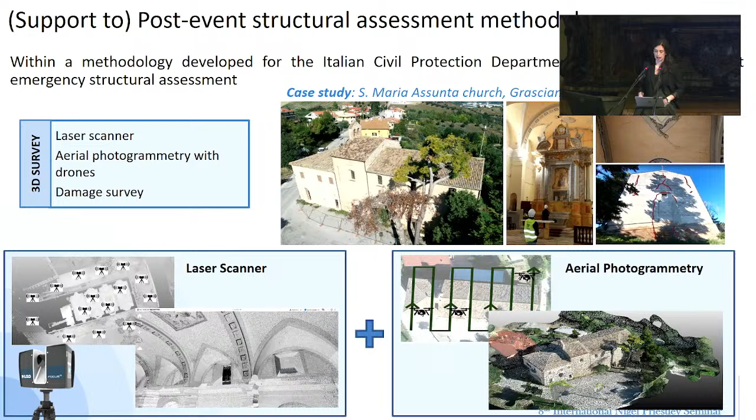So let's start having a look at what we have developed in recent years. Some of the technical services we have developed for the civil protection, for example, methodologies that are applicable in case of post-event. These methodologies have been successfully tested, and now the use of digital applications, for example, allows us to perform 3D surveys, photogrammetry that allows us to create a digital twin of the structure that can be later used for final structural modeling or a simplified analysis.

All the data that are collected during the survey, especially on the damage conditions of heritage, can be accessed thanks to the use of virtual tools, in which all the information on damage patterns can be used at a later stage to design correctly interventions for such typologies of structure.

We also operate at a larger scale, when a survey of a large area is required, for instance, with a photogrammetry methodology that we developed to map large areas in a limited amount of time. This methodology is applicable in emergency contexts and is based on practical experience, and of course, the coordination with the stakeholders and regulator was fundamental for its application.

I'm showing you two brief examples of what we have done. For example, the purpose of the exercise was surveying a large area, using two teams that were working in parallel, with a spatial and temporal coordination. This allows us to produce not only

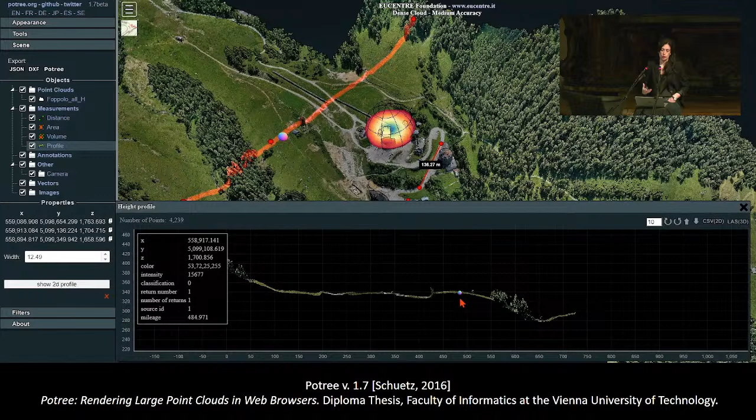Also because the access to technology may not always be easy. Tools like Potree offer advantages. The great power of this solution is that it's possible to share a point cloud on which measurements can be performed, so that the first responder can perform immediate assessment, especially of the critical operation areas.

The second application was a large technical and thematic seismic exercise that took place in the autumn of 2023, in which all the participants were coming from 8 competence centers, and the exercise was designed and promoted by the network. In this case, 5 teams were working in parallel. We have surveyed a total area in a very limited amount of time.

In a total mission time between 2.5 hours, maximum 3 hours, to produce the same type of product that you've seen before for the previous case. The total time for processing is about 2 hours, but the amount of data is significant.

Then, thinking about what we've done so far, what are the challenges, from our experience in our center, at least from my limited point of view? Of course, the team activation is an issue, especially for us that are belonging to a center of competence, and not directly to the drone pilots. The team activation for drone pilots in operation areas, because of the regulation, is still something that needs to be discussed.

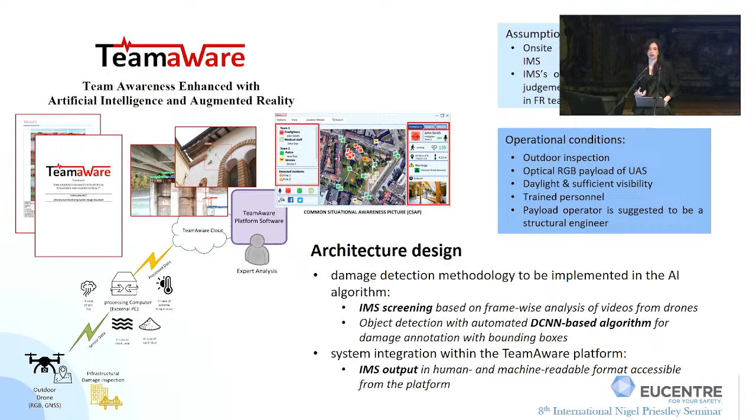The methodology that we have implemented is a tool that is able to screen video acquired from drones, and detect and extract information about damage on buildings. The system is integrated in the platform and allows us to provide to the command center information on the structural safety of the structure. Essentially, this is the application of an infrastructure monitoring system, assuming that we are in a monitoring scenario.

We have provided guidance to the first responders on how to perform the mission, how to acquire data, giving information and instructions on how to perform a survey with the drones. The data are then processed through the user interface, and then the outcome comes in a machine-readable form, so that a tool is installed on the ground station.

If the tool is installed on the ground station, it's present on site and the results are readily available. If not, if the presence of a structural expert is from remote, the data can be uploaded on the platform. Engineers can use the information that is given to perform a structural assessment and then provide information to the teams on site.

Essentially, this is how the tool works. The damage detection module is based on the architecture available at the time in which we developed it, and we are further developing it, constantly using new architectures. The output reporting module allows us to clean and interpolate the information in order to extract a sort of damage lifeline, that is presented as output in the form of a report that is then uploaded on the platform.

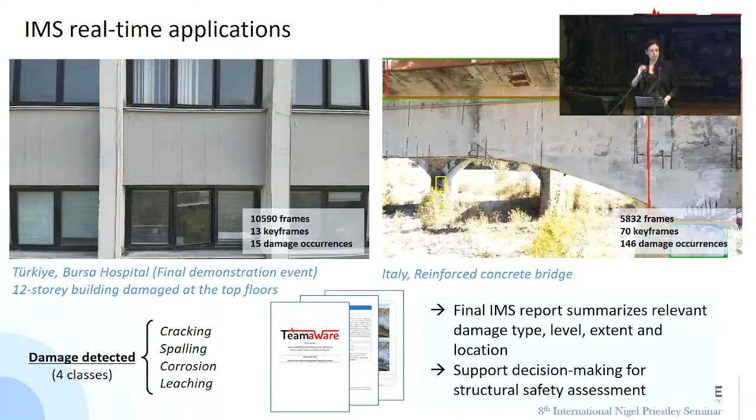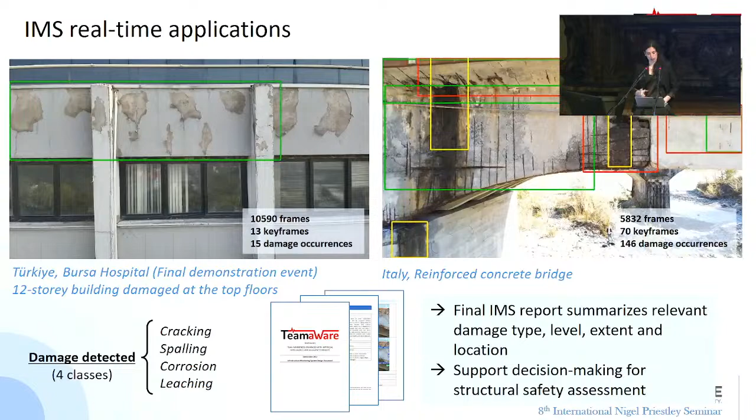Of course, the tool has been tested by the users that were involved in the project. The level of accuracy is still not perfect, but this depends on how much data is used. Although we are using something like 25,000 images, we have tested it only on real images, and there is still work to do in order to reduce the number of false positives. Nevertheless, with an accuracy of approximately 70%, it is a tool for end users for which we had positive feedback.

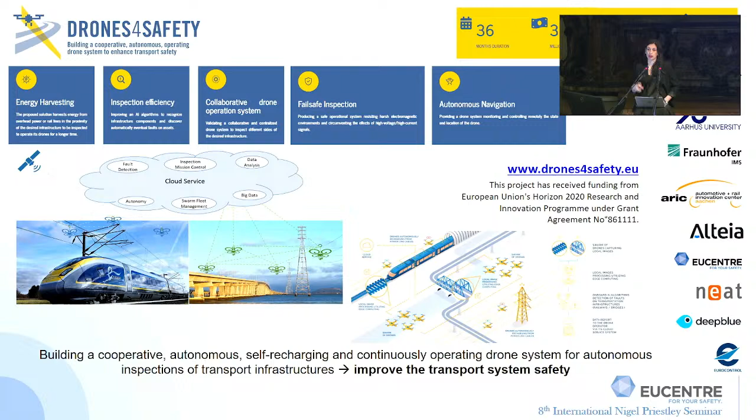The integration of different sources of data, surveys, point cloud generation from photogrammetry and artificial intelligence was also at the basis of another project named Drones4Safety. In this case, the focus was on the monitoring and maintenance with coordinated teams of drones that are supposed to perform autonomous flights recurrently to inspect the structure. We merged the competencies on artificial intelligence with competencies on photogrammetry in order to provide information directly on the cloud on the state of damage of the structure.

What are the challenges? A few of the challenges that are now in place with artificial intelligence. Of course, we need data that are sufficient for the training. We cannot think about algorithms that are trained with a few hundred images, because these are too limited information for an algorithm, especially for real-time applications. Also, there is a need of crowdsourcing. There are only few databases that are available.

We need them to develop instruments that are efficient and applicable. Also, for algorithm development, algorithms are still more focused on the detection of a single class, whereas on field we need information on different classes. Multi-class detection is essential for responders to understand what the situation is. Also, depending on the typology of data used for training, the metrics for the evaluation of the performance of the algorithm are not always efficient.

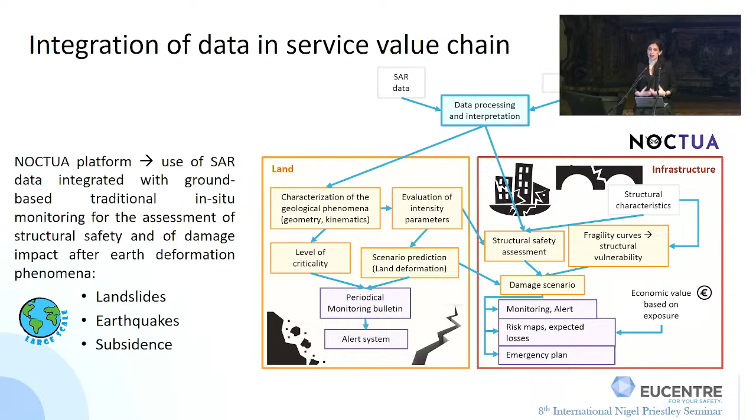We think that the integration of data coming from different sources is essential to provide first responders with meaningful, reliable, and accurate information for emergency management. Not always is the information from satellites easily understandable.

Also in this case, the level of technology required to interpret information coming from the satellite is not always available for the institutions actually working in emergencies.

In this case, the integration coming from monitoring is essential to validate. I'm thinking about the data that are coming from radar sensors.

We are easily drawn to understand the displacement in terms of evolution of displacement, but this is not the direct displacement of the point. This is the relative displacement of the satellite.

This is not always understood by those who will use the information in the field, or they do not have sufficient information to understand the meaning of these results. So these are some of the challenges that we see.

For instance, for the user in Earth observation applications in emergency, the challenge sometimes is also in the data collection, because cloud coverage could determine that the satellite is not capable of picturing imagery, and then the information that could come from satellites is not available on time.

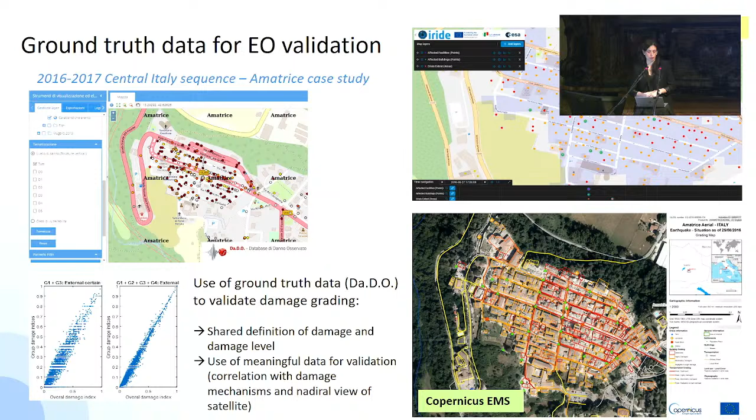In conclusion, I think that there are some issues, some challenges that are common, especially to the most innovative technologies.

We need to think that the solution that we develop has a sort of trade-off.

Because of what I was saying before, not all the institutions taking care of emergencies have available financial resources.

You think of a very high-tech solution, very costly instruments to be maintained over time. Sometimes those institutions are not capable to use them if something breaks.

So sometimes we need to think not just in terms of content of what we develop, but also on the availability and accessibility of the technology, and the technical limitation of who is going to use what we develop, as well as the creation of the technology.

We are developing algorithms, very demanding algorithms. There are cloud services, but what if in an emergency the Wi-Fi connection fails?

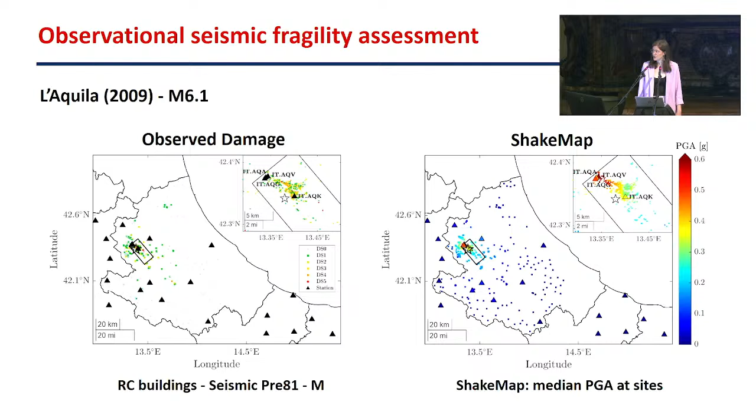On the right you can see the shake map for the event under consideration in terms of median. Once we have this information, we apply models and fitting techniques in order to calibrate the observational fragility functions.

These are the fragility curves obtained when we consider the median shake map, referring to the seismic case study building typology.

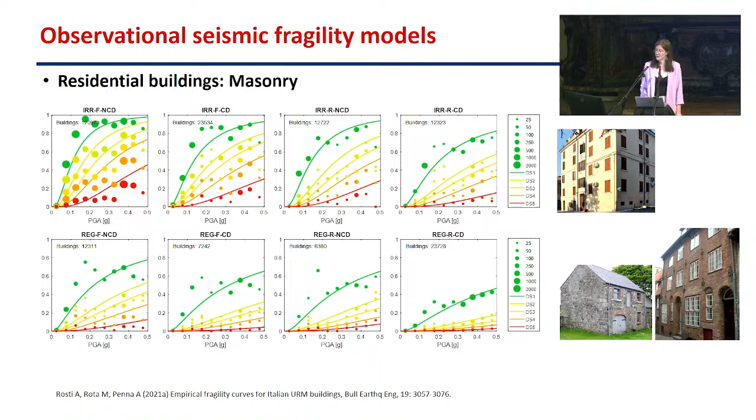Here I'm showing as an example some observational seismic fragility models considering the median shake map, referring to residential masonry building typologies and residential RC buildings.

The fragility models that I have just shown, existing observational seismic fragility models that you can find in the literature, have some limitations. The first issue is that we consider the median shake map for seismic input characterization.

These seismic input characterization models neglect the shake map model uncertainty, which is due to the ground motion prediction equation and the spatial correlation model. This is not consistent with the principles of probabilistic analysis, because seismic intensities at the sites are actually unknown.

The exception is the few sites where we have recording stations. There, basically, the intensity measure is known because it was recorded during the event. So we are actually lucky in that the model is known.

For implementation, it is assumed that the logs of the ground motion intensity in the area affected by an earthquake form a Gaussian random field. This basically means that their joint distribution is specified, so the stochastic model of the ground motion intensity in the area is fully specified by the mean vector and the covariance matrix.

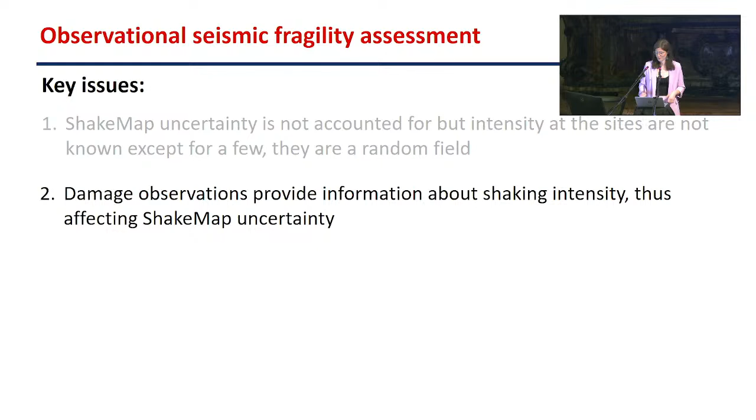So imagine that we are considering S sites. Of these sites, K are buildings, where the shaking intensity is unknown, and the complementary number, in this case S minus K, are sites where the intensity measure is known because it was recorded during the event. Now this is basically our starting point.

We know how to deal with this issue to account for basically the shake map uncertainty, but still we are not considering the maximum level of the available information. Also, because buildings' damage observations provide information about the ground shaking at the sites, meaning that the exceedance or not exceedance of a predefined damage state provides information about the fact that the ground shaking has been sufficient to cause the observed structural response.

So this is because buildings work as simplified seismic stations, and have to be considered in order to inform the shake map of the event under consideration. We will never neglect information provided by accelerometric stations that are basically a few. At the same time, for the same reason, we cannot neglect information which is provided by thousands of buildings. The difference between damage observations from buildings and recordings is that the information buildings provide is not in g units, but it's provided in terms of damage levels.

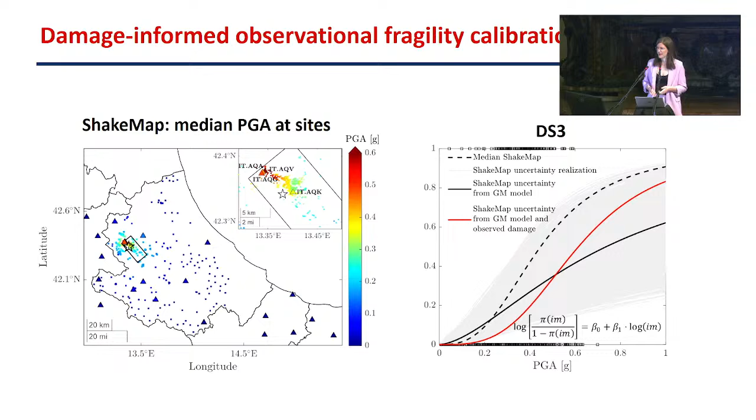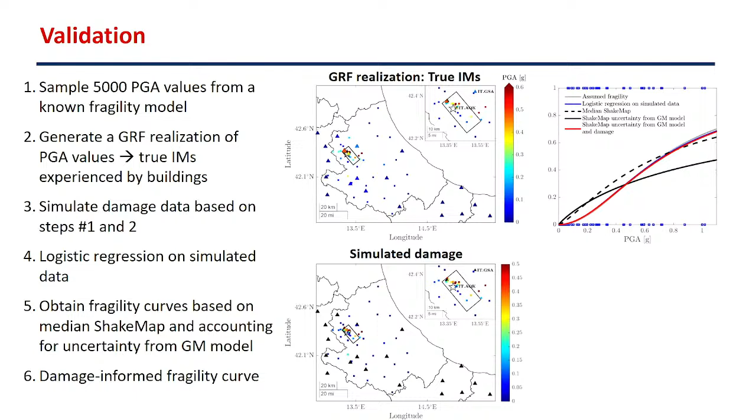This is the curve. The red curve is the one that we obtain from the implementation of our algorithm, and you see that it basically matches the fragility function that is the logistic one. In order to investigate how damaging, we also computed some distributions. So here I'm just showing the results for some sites because of time.

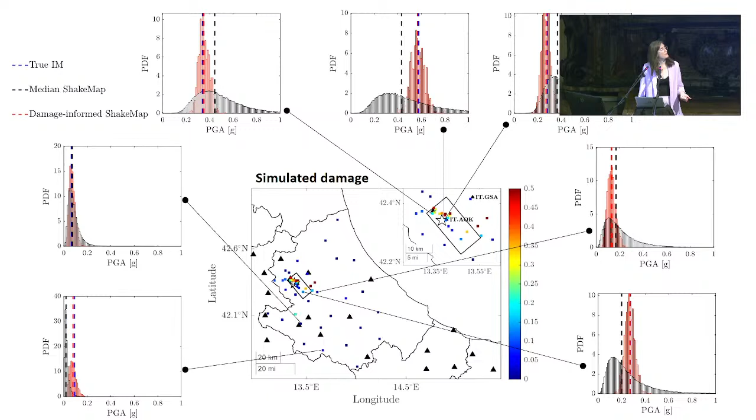First of all, you see how we can actually reduce the uncertainty, and also we evaluated the average value, represented by the red dash, because it's very, very close to the true intensity measure at the site.

So in conclusion, most existing observational fragility models do not consider the uncertainty. We have said that this is not consistent with the principles of probabilistic analysis. Based on this consideration, we developed a maximum likelihood estimation procedure to account for all the information available: the uncertainty in the shake map, measurements from the recording stations and damage observations, all damage states and all building typologies in principle.

The approach is rigorous, but the direct maximization of the likelihood function is challenging. This is why we consider the expectation maximization algorithm. The main conclusion of this study is that neglecting the shake map uncertainty implies bias in the resulting fragility parameters, and for this reason we should be more conscious and aware when we calibrate observational seismic fragility models. That's all, and I really thank you for your attention.

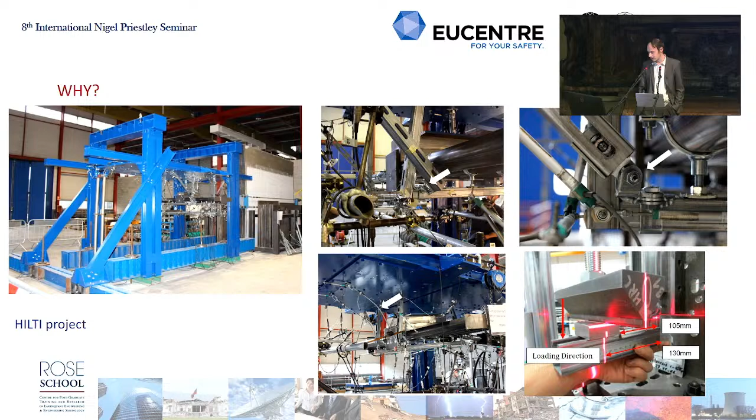So which one is the right topic to go for? Maybe a project, so many testing efforts, the team, community engagement, or maybe the project. Again, facility, project. So which one is the right one to go for? In this case, we have some restraint installation tested components, components of very peculiar structural elements, facade systems, or maybe purely theoretical structural elements, or maybe progressive collapse of structures and structural assemblies.

So I got a bit confused, and before selecting, I decided to go back to the original invitation, which roughly translated asked for a piece of recent research, and I would leave in round parentheses what is recent. So I asked myself, okay, why don't you go back to the modeling topic, which is one of the very first topics, for my master thesis? So why don't we go for this 13 years old one? The positive thing is that you already have your presentation done. So it's just a matter of retraining it.

Not only because of the format, not only because of the details, a couple of many details in this cannot find their way into a proper presentation. When I selected this topic, I was told by wise people: listen, we have this kind of elements, and there are concerns about their behavior. They were observed to fail at loads much less than those predicted by codes.

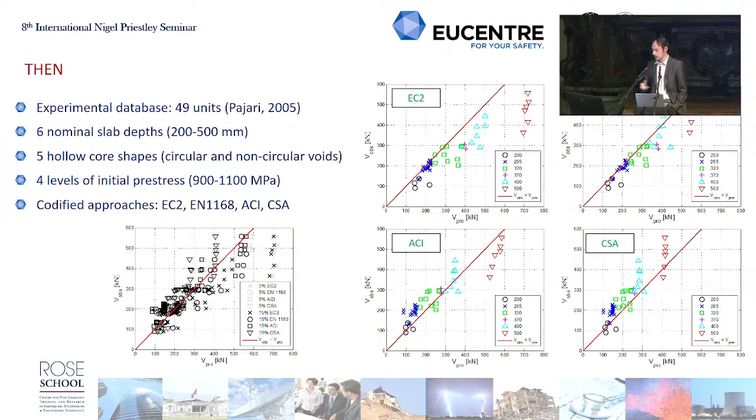Versus the observation on the y-axis, so which one is over-predicting and under-predicting. Then an overall comparison, and finally an effect of stress loss. So we selected 9 units, which were modeled using brick elements and embedded line elements, with an exponential tensile and compressive behavior.

Calibration of the fracture energy was according to Model Code, and we considered some sort of sensitivity to mesh. You can see also some examples of the different 9 units, which had different depths, a smaller database representative of the entire one.

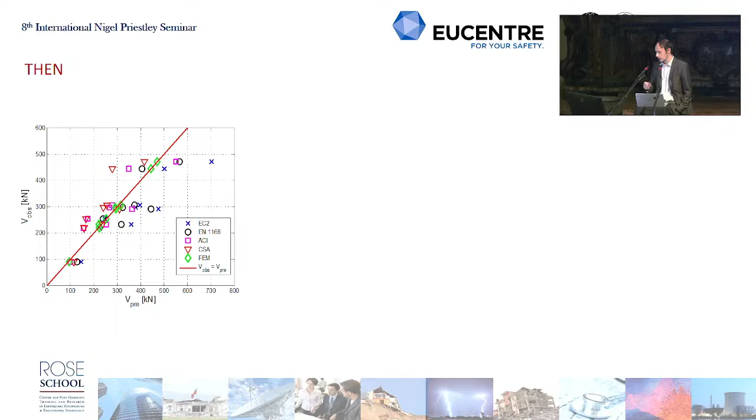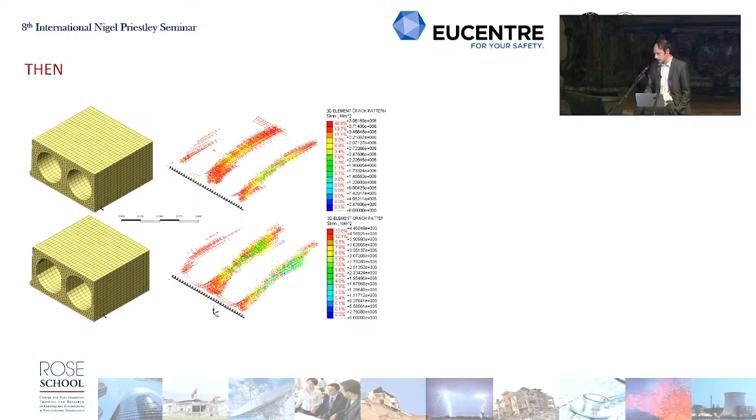This is reflected also by the principal tensile strains. You have two different units with different void shapes and more or less the same depth: a very linear crack, and a more rounded one related to the shape. The same comparison in terms of principal tensile strains, like an overlap for the two units in a specific point. So the crack pattern is also in line with what we were discussing before.

And finally, some experimental observations. These are not the elements that were tested by Pajari, but rather others, since there was no crack pattern available. In this case, still you can see a clear difference in the evolution of the crack, these elements having completely different behavior.

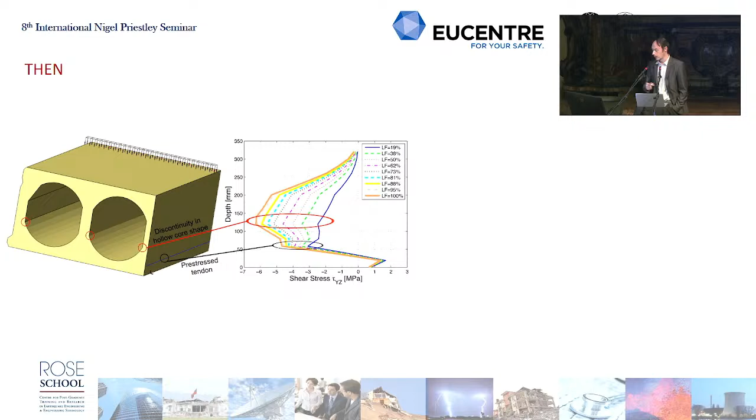So coming back to the distribution, you can note that there are discontinuities in correspondence to the pre-stress. These zones are very much disturbed by the fact that the force is not yet developed. And also another discontinuity corresponds to the very edge part. So you can also see that.

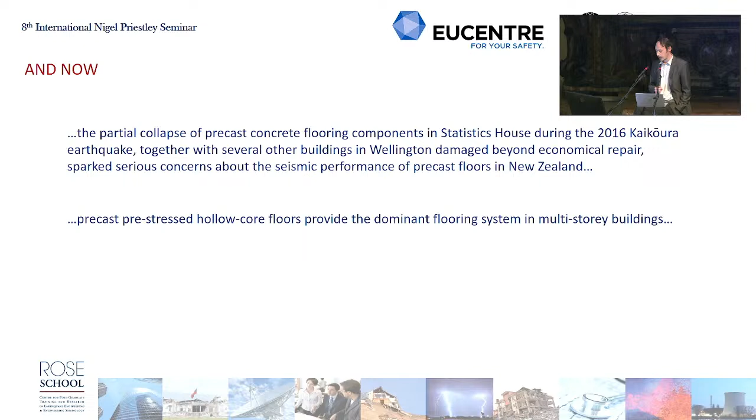But then a brilliant PhD student took over, following field observation of failure during the Kaikoura earthquake. There were serious concerns about the seismic performance of this typology, one of the most dominant flooring systems used, and the situation was more or less again industry asking academia for clarification, a multi-year project involving universities and others.

So the point was, we have a model, we can make use of it.

Given the amount of experimental information available, we couldn't even retrieve a 40% comparison to the most updated model by Pajari, which was the best one available at that time. So we decided to go back to the lab and undertake some testing.

This testing was carried out at the University of Auckland. Here is an example of the experimental setup and the characteristics of the selected hollow core unit, the most typical one at 200 millimeters, with some variants in between non-circular and circular voids. You have the characteristics listed there.

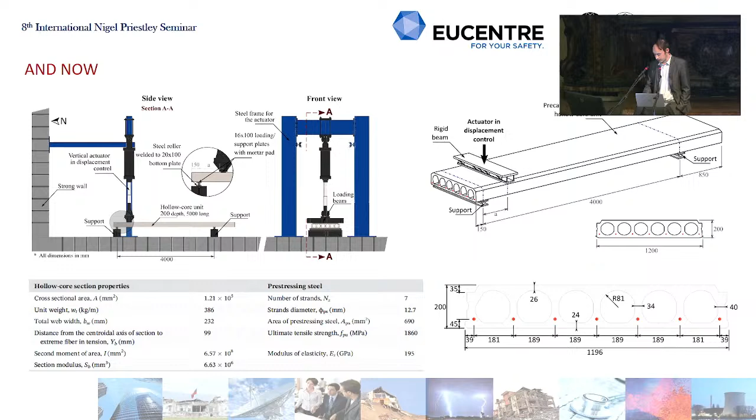This is the instrumentation used for this kind of element, which is possibly overkill, partly because of the lack of experimental data. Good experimental tests with this kind of instrumentation were almost the only ones available, and they let you get not only the clear load-displacement response curve, but also the strand slip and indications of crack opening at the deck, measured through portal gauges.

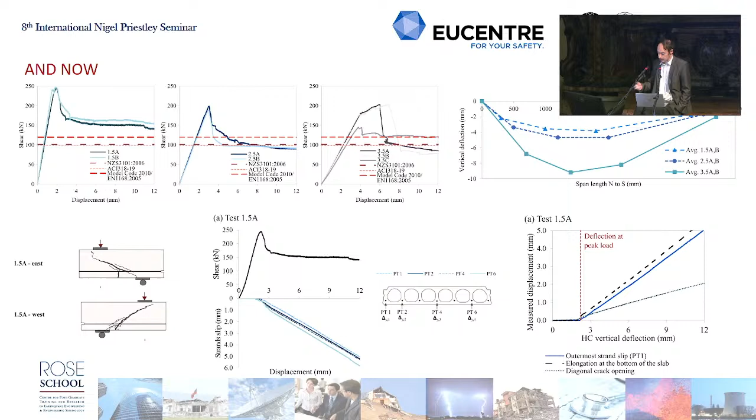With this, we also decided to go for some material characterization testing, doing the best we could at that time on the hollow core units.

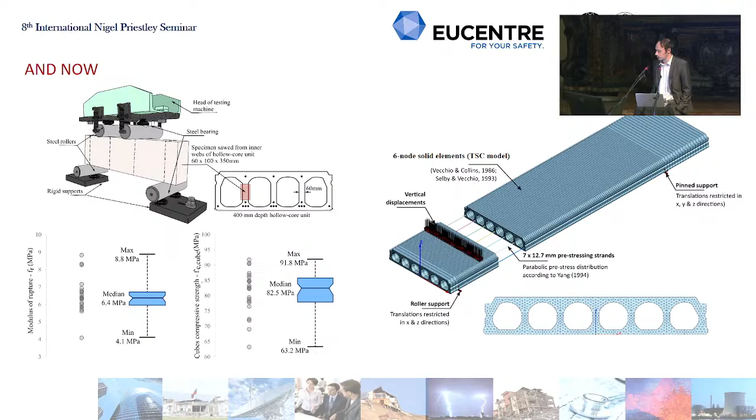You have an idea of the distribution coming out from this testing, which was used to calibrate the model. The concepts and criteria were the same; in ten years we've really just been able to change the color of the plots, so to speak.

In addition to that, you can also make use of this kind of data for sensitivity analysis and obtain tornado diagrams, which tell you essentially which is the most sensitive parameter or random variable for the response of this kind of element.

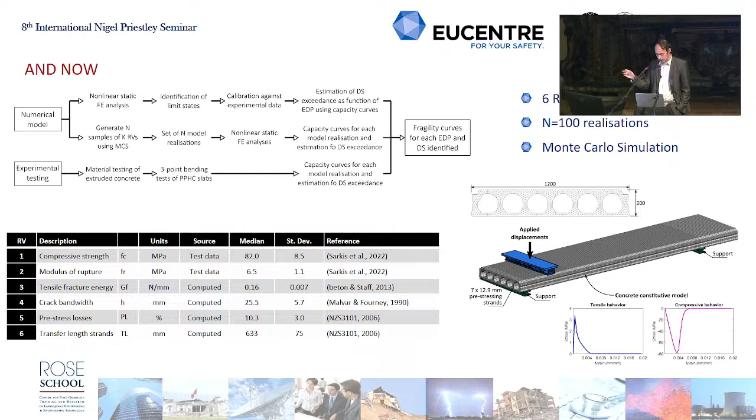While running the analysis and waiting for results, we were asking: what about torsion in these kinds of elements? Is this model able to predict torsion as well? We decided to undertake some analysis for the torsional case too.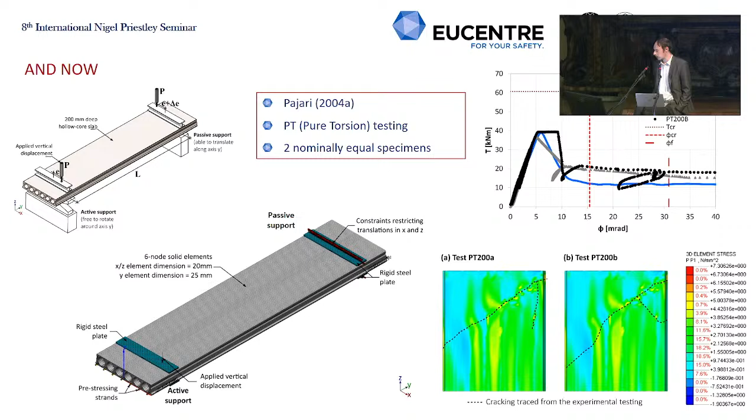So the softening is quite different, which is reflected in quite a different crack pattern, but the model is pretty much okay in predicting both overall.

Even in this case, what you can actually compare is just what's applied by the actuator. The comparison is kind of good in the sense that we are within 5 to 6% mismatch.

A comparison between what you can get numerically and what was observed experimentally. I hope you can note this by the yellow ellipse. The red concentration is very much in line with what you have observed. And then another comparison for another specimen which is different.

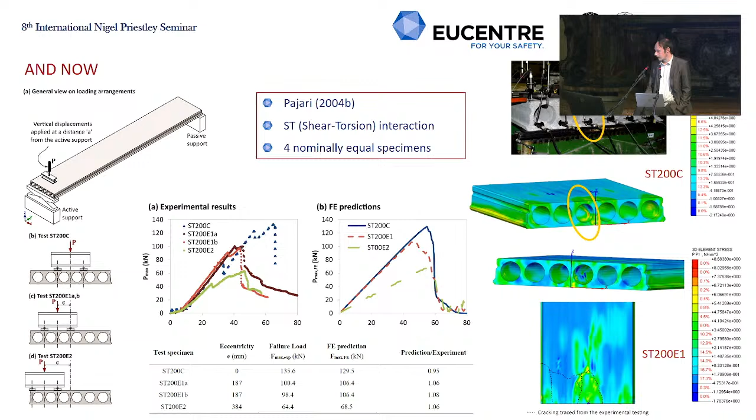We were pretty much okay with the validation of this modeling concept, and then we decided to go and analyze further.

In this case you have the prediction. You can see the prediction done based on New Zealand code. It's not that accurate, especially if you go for analysis of data based on what the producer has declared.

In addition to that, you can see that this model is able to predict the fact that the assumption of plane cross-sections remaining plane is no longer valid.

We were pretty much satisfied with the torsional behavior, and we were still running the fragility analysis.

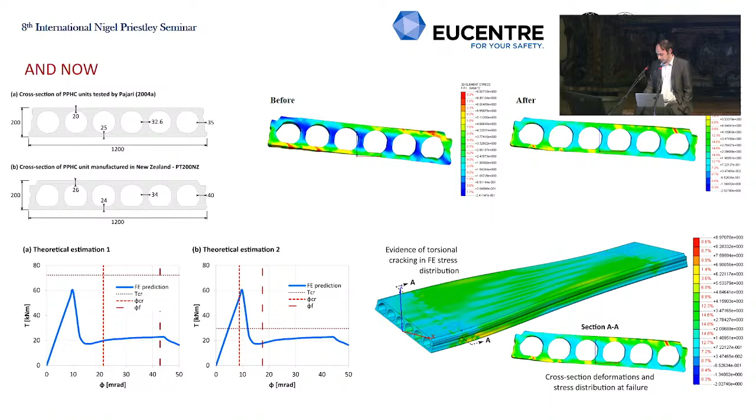While waiting, we go for a part modeling concept. What if we make use of this modeling concept for the slab, but also not only the slab? So what about the sitting beam, for instance?

You can see some characteristics of the case, which is a very typical case in New Zealand. The rules were very typical of New Zealand.

The rules for the modeling were pretty much the same, in the sense we decided to go for a brick element kind of approach for the steel mesh topping.

And again, you have an example of the experimental setup for this kind of testing. The testing was not as easy as the one we have seen before.

So the comparison - the model is predicting the response, which is no longer a monotonic one.

The extension of the criteria is quite accurate in predicting both the response and crack pattern, at different steps of the numerical response.

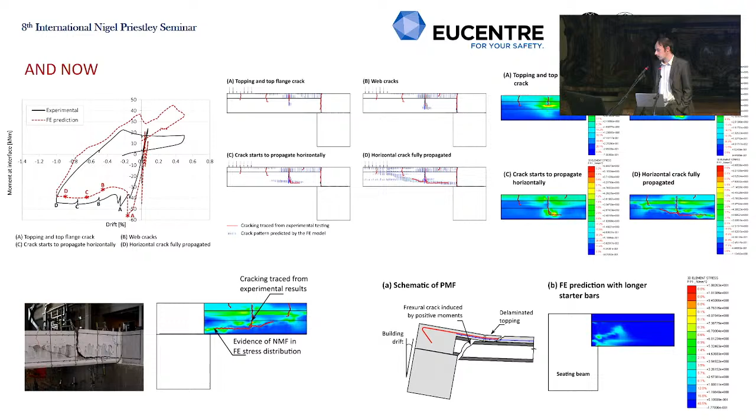Maybe you go for positive moment failure, and the model is able to capture that as well.

So, one year later - and I'm not joking - one year to go for that.

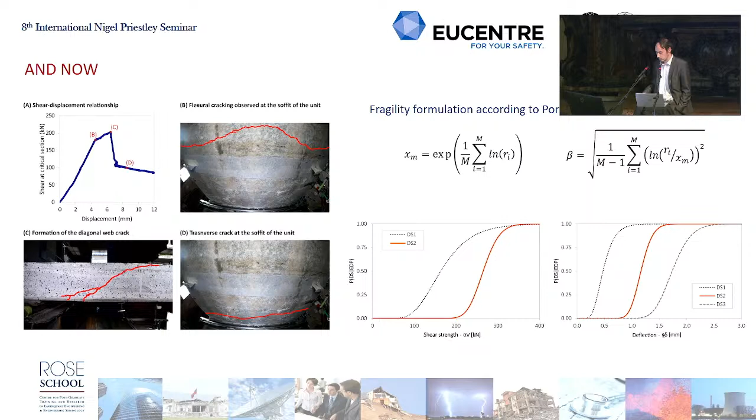After all this analysis, we adjust to properly identify the limit state. We want an initial flexural crack, a diagonal shear crack, and then a fully propagated shear crack, following a formulation according to Porter. Here are the fragility functions we derived for this kind of EDP, shear strength.

We have some sort of confidence test to see if the distribution we assumed was appropriate, and after all this we decided to go for some sort of simplified approaches.

The idea was to try to reduce the number of analyses by using extreme value distribution, and the most significant fragilities are, for sure, different for the kind of application and type of uncertainties involved, though overall they are not so different.

I'd like to close with the fragility for shear, which is the one you're not just looking at because you have shear strength, and the residual capacity could be good to know, what capacity you have pending in the element. Also comparing the three different approaches, again, they're not so different.

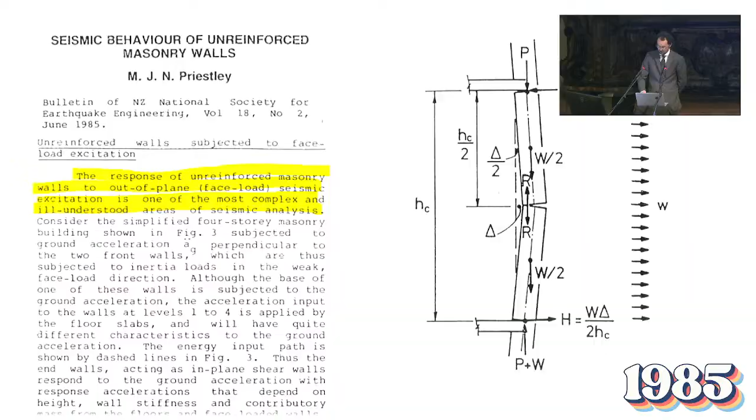In 1985 he wrote that the response of masonry to seismic excitation is one of the most complex and ill-understood areas of seismic analysis. I am confirming this, but it's also one of the most vulnerable mechanisms that could happen in masonry. Consider that these pictures with blue sky were taken just after working in Visso, Central Italy, after the event of 2016.

As you see, they are generally at the upper level, with low overburden pressure that is reducing the capacity of this type of walls, as well as the structure tends to filter and increase the acceleration. These concepts were very familiar also to Nigel in 85. After almost 30 years, in particular in 2012 and 13, someone was still concerned about this.

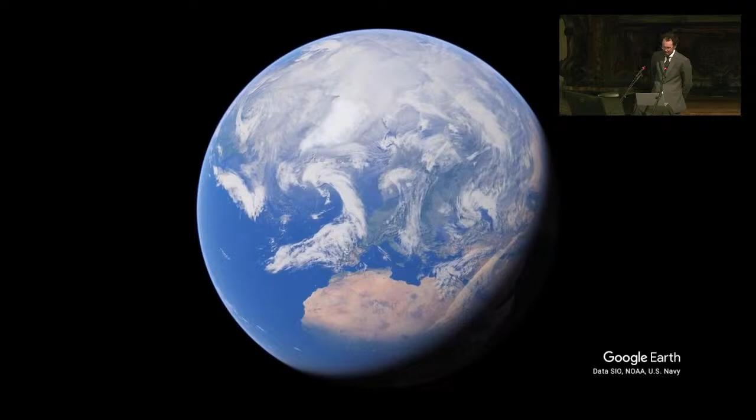This is not New Zealand. This is, as you see, the windmill. It is basically in the northeast of the Netherlands, in the middle of, let's say, the countryside. I want to say nowhere. This is the place where in 2012 a magnitude 3.6 earthquake was recorded. Magnitude 3.6, less than 0.1 G. And I know that most of you are thinking it is a bus passing by my house.

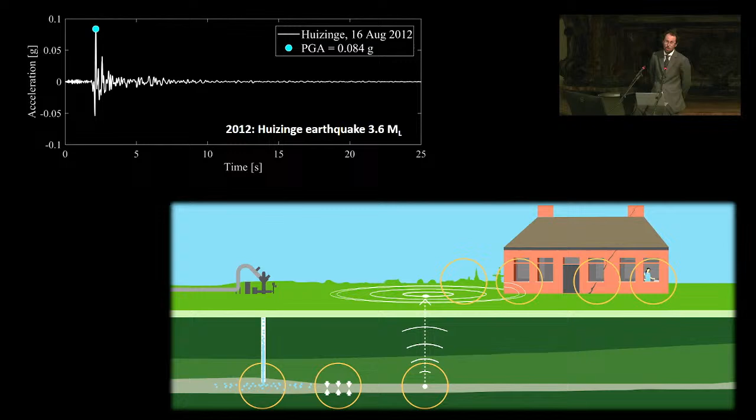The problem is that this becomes relevant from the political and economic point of view, since this is induced by the gas, a human-induced earthquake. In fact, the Groningen gas field, when discovered in 1959, was the largest gas field in the world, and today is still the largest gas field in Europe and one of the 10 largest gas fields in the world. Basically, from 1991, these tremors began to happen.

And with the maximum level of magnitude recorded in 2012. As you see, the environment, the panorama was very quiet.

So in this context, the center was involved in a project aimed at assessing the vulnerability of Groningen buildings. There was at that time an important lack of knowledge in what resulted to be very important, for example, the effect of low magnitude, the seismic behavior of this peculiar structure, very slender cavity walls, and structures that were never exposed to the excitation expected in the area.

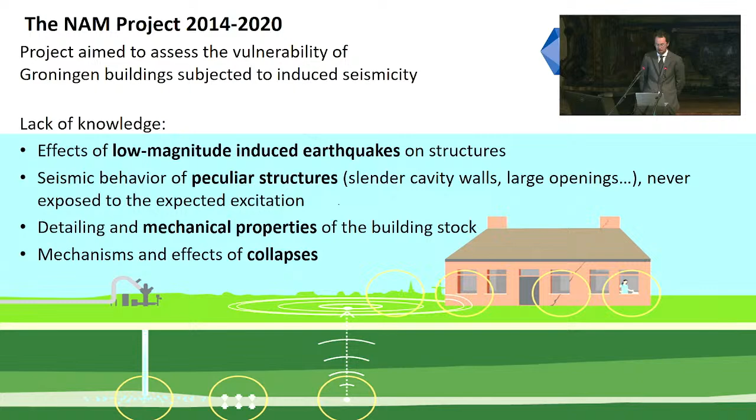Also detailing and mechanical properties of the building stock in general, since the hazard and risk assessment had as study objective individual risk, so the loss of human life, also the collapse; this type of mechanism was very important. Something that in literature was missing. One may think, okay, we can address these, as we see also in the presentation of Emanuele, with laboratory tests or numerical analysis.

But let me tell you this story. In 2013, Professor Mike Griffith from Adelaide came here to teach a class with Professor Guido, and we were looking at a test, probably a test on the shake table. We were at the window, at the center, and he told me, Kiko, I have to tell you something really important about numerical analysis. Me, recently graduated, this guy came from Adelaide to tell me this. Nobody trusts numerical analysis except who conducts them, while everyone believes in experimental tests except who conducts them. And this is super true.

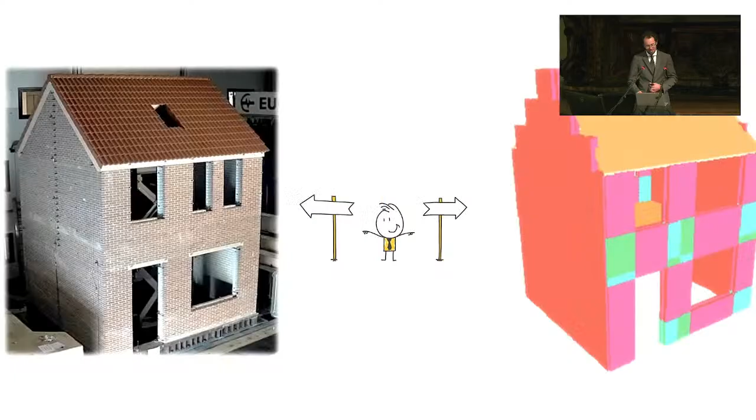Actually, the genius was not him himself. It was one of the pioneers in using computers for solving engineering problems in Australia after the Second World War. So in this context, you really understand that this phrase is really nice. So there is nothing to choose. We really need both of them. They are absolutely complementary.

In 2014, we started this experimental campaign that turned out to be 5 years, one of the most extensive experimental campaigns ever conducted, especially considering that we tested more than 500 in situ, 10 in-plane quasi-static tests, 15 out-of-plane collapse tests, roof structures, and 9 full-scale URM, 2 of them at the center and LNEC.

So how we used this experimental data to assist basically the development of this hazard and risk model. First of all, identify the vulnerabilities of the structure. We thought something before the experiment, and we are thinking something else now. Supporting the calibration of numerical models, supporting the development of the exposure database with the in-situ tests, supporting the development of consequence models with the LNEC collapse test, and publish and give access to all the data. This was very important also to allow collaboration.

But what I want to show you today is how we took advantage of an industry-funded project to make steps forward in different fields. This was a well-funded project, to be honest. And Rui is laughing. Beyond the mere scope of research, I mean.

First of all, in my opinion, we improved a lot the testing methods and data sharing. We developed simplified numerical models.

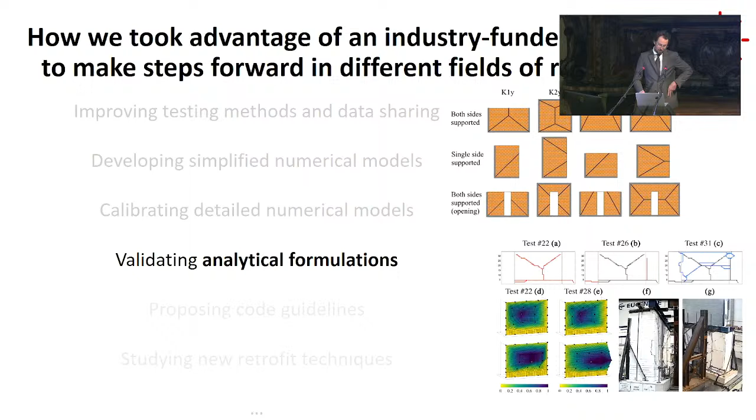As you see, the wall, I mean the load-bearing wall, is as thick as the famous album by Jethro Tull. You can imagine how it is to construct, don't think about testing, but construct a house with a 3 meter high interstory and a 10 centimeter thick wall. It was really a 10 centimeter thick wall. By the way, the title is not completely out of place.

Because at the beginning of the project we had to decide which one to test first. We collaborated a lot with Arup, another alumnus, Michele Palmieri actually, and we were looking at the various terrace houses present. So basically, we tested a Martini house, shaken, not stirred.

The super slenderness of the wall actually pushed us to try, as the first attempt, the out-of-plane behavior of this wall. This is when you are dealing with this type of wall. So we gained really reliable data.

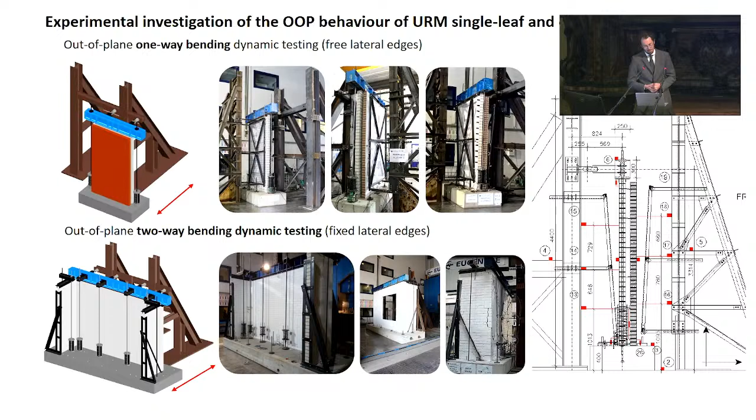We focused on this type of test with clear boundary conditions and clear input conditions, so any numerical variation can be easily done once the phenomena and the problem are well known. But having reliable data from the beginning is very important.

Consider that, especially the one in one-way bending, so the most vulnerable one, damping in this type of mechanism is governed by the impact between the rigid block and the ground, and this is a function of velocity between the two blocks. So you need dynamic testing. This is not true for all the cases; for example, a cyclic test may be very helpful.

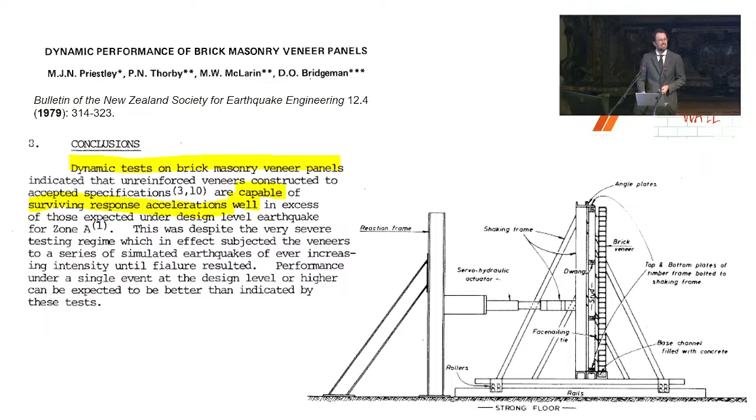By the way, we discovered that actually Nigel Priestley copied our setup in 1979, the year of Pink Floyd's The Wall. I don't know if it is a case. Just to tell you that we did not invent anything.

We spent a lot of time modeling the out-of-plane, not only the one-way bending, and dynamic behavior, and developing tools that are really effective in general vulnerability risk.

What about full-scale testing of buildings? I told you, we tested 9 of them in 4 years. Actually 10, to be honest, because in the meanwhile, in 2017, we also tested a 100-ton four-story building in the framework of a project aimed at assessing the vulnerability of the city. So basically we tested 10 in 4 years.

What is important in my opinion to understand here is that we actually made a virtue out of necessity, in the sense that for some reason NAM wanted to have the report right after the first test. And we had, I don't remember, 1 or 2 weeks, nothing.

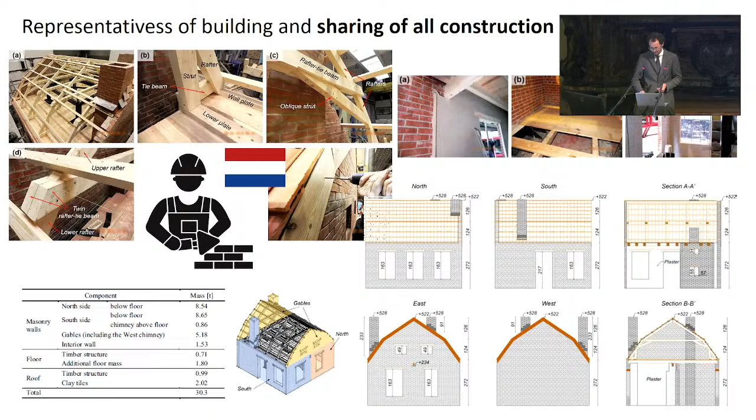Okay, I will jump quickly on the representativeness of this building. Look at the detail of the roof. Maniacal detailing. A lot of material characterization; we will come back on it. And instruments, sort of live elaboration of data, allowed us to really push the limit.

For example, this is a collapse test performed in LNEC with a chimney, and this is another test where we actually didn't understand the behavior. We didn't expect anything about this test, and we actually had a full collapse. I don't know why it was standing after. Usually when something unexpected happens, this is good news for research. There is something new to understand.

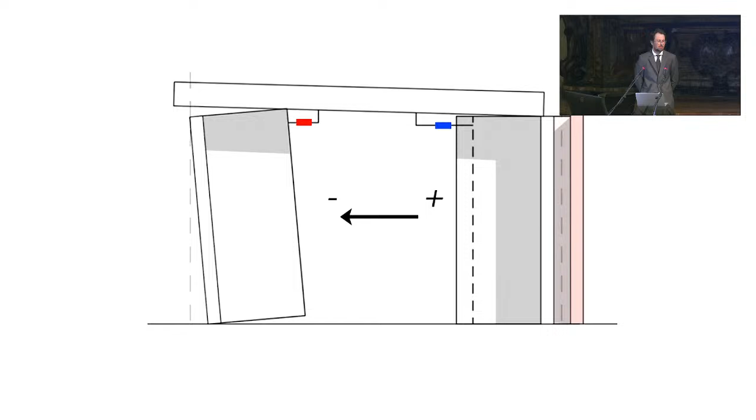In this case, it was the in-plane uplift of walls that actually completely changed the boundary condition of the out-of-plane wall, leading to collapse.

The number of tests allowed us to get a statistical distribution. I perfectly understand that 10 is not a statistically representative number, but at least an idea of the variability, to identify the limit state. This is very important for performing a risk study like the one that was conducted.

We also tried to test in the test, so dividing the house into structures and studying just the roof, or sometimes the west side, and we had the chance also to test the qualitative behavior of non-structural elements, as you see here. IKEA cheap Billy furniture is sustaining the wall and really changed the crack pattern. But also from the quantitative point of view.

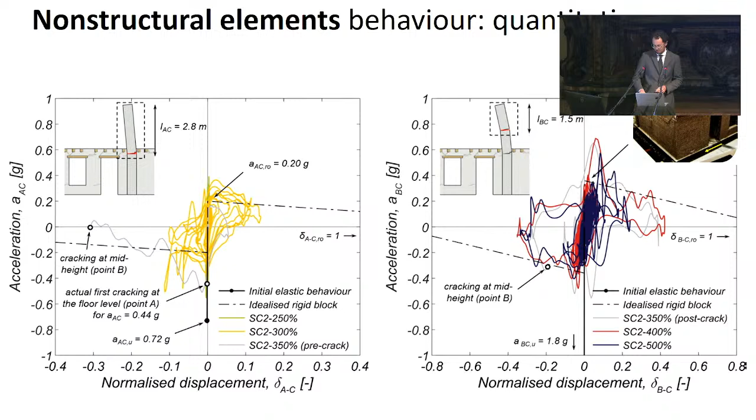Nothing was available about chimneys, nothing quantitative. And this is a study on this type of elements.

This work, the use of the macro element for the nonlinear dynamic representation of masonry buildings, was a work already begun much before the NAM project, but it was really fine-tuned in the project. And this is an example. I had another story about that. But just consider that this is a blind prediction. It is not really blind, but the prediction is not finely tuned.

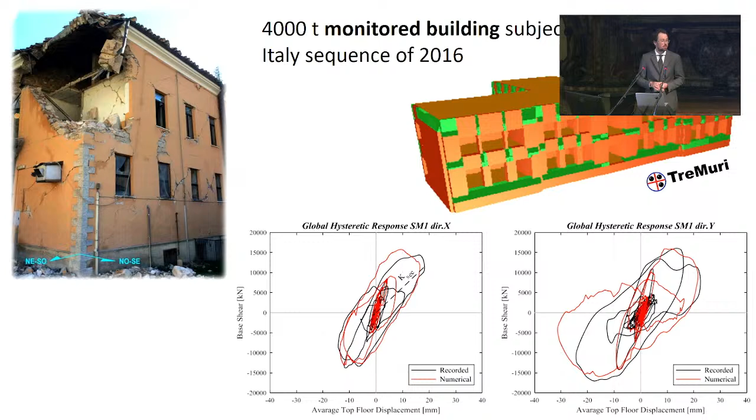4,000 tons of monitored buildings in Central Italy. Detailed numerical models: I see that fortunately Andreotti is also here today, so we also use very refined numerical models. For example, in this case, with these numerical analyses we understood what's going on and proposed step-by-step guidelines for some in-situ tests and a procedure for interpretation.

From the mechanical point of view, this model was also very useful because we noticed that the torsional strength of masonry is actually the parameter governing capacity in bending, especially when you have strong brick and lime mortar. In some cases, especially where you had sand, the torsional strength was higher than the theoretical upper bound of this strength, which considered basically a fully plastic distribution of strength.

This is due to the fact that dilatancy tends to expand the joint. So basically you create a non-homogeneous compression field, with a higher stress far away, where the lever arm is, increasing in some cases, when there is this dilatancy, the torsional strength through a sort of self-restrained dilation.

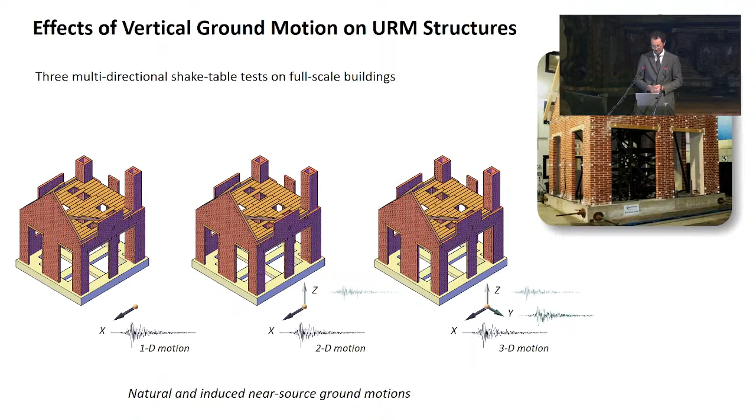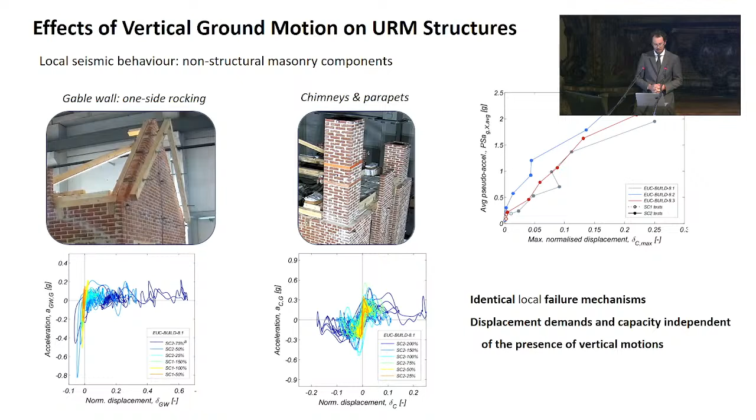What we discovered is that, at least for the type of structure we are looking at, the effect of vertical ground motion is similar failure modes, a non-systematic influence of vertical acceleration, and by far a more significant influence of the second horizontal acceleration. This holds both for the global behavior and for the local mechanism. But again, this was just one experiment, three tests.

So, in reality, to see the real influence, you have to calibrate and run analyses with really different motions. And what we discovered is that in reality there is an influence, but it is within the range of variability of many other factors.

We had the chance also to conceptualize this new system to improve both in-plane and out-of-plane capacity of piers: timber, so low carbon footprint, an integrated energy and seismic retrofit, consuming less gas, with less hazard in the field, and then it is removable. This is a very nice concept because these earthquakes in the Netherlands will stop, so you are installing something that is not permanent.

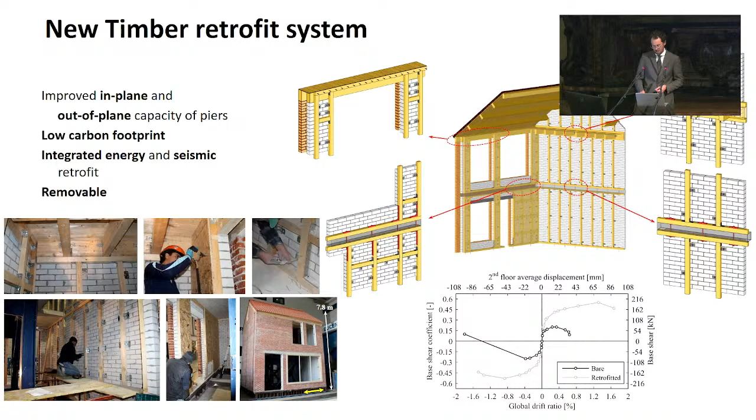I know, 24 minutes. Okay.

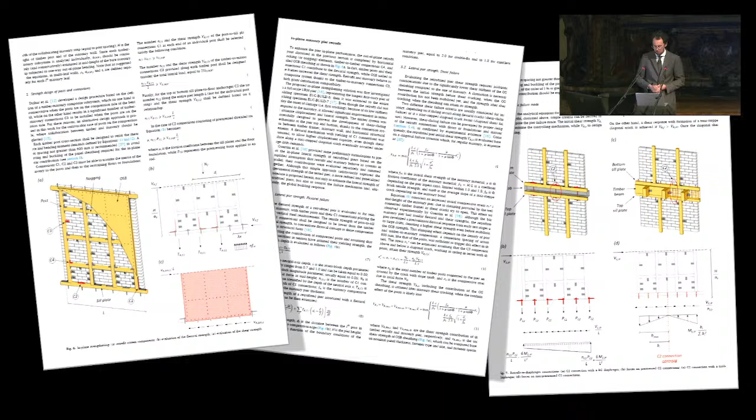This is a modular design, so basically you can adjust it based on your needs. But in my opinion, what is more effective are these detailed guidelines that explain step by step how to design this type of retrofit.

This is one of the cases where cyclic tests were super important. It is much easier to understand the mechanical behavior of such a system if you test the element quasi-statically. For sure, the shake table test is the final one on this topic.

We are now collaborating with the University of Trento for a test held in Patras in the framework of the SERA project. The name is Strong Sustainable Timber Retrofit of Concrete Buildings. The idea here is to retrofit the frame as well as the infill, and this very nice next test will take place soon.

After the LNEC test, where we had the collapse, it is very interesting, but the motion of the roof was not controlled. What if we would have a more rigid roof, or a less rigid roof?

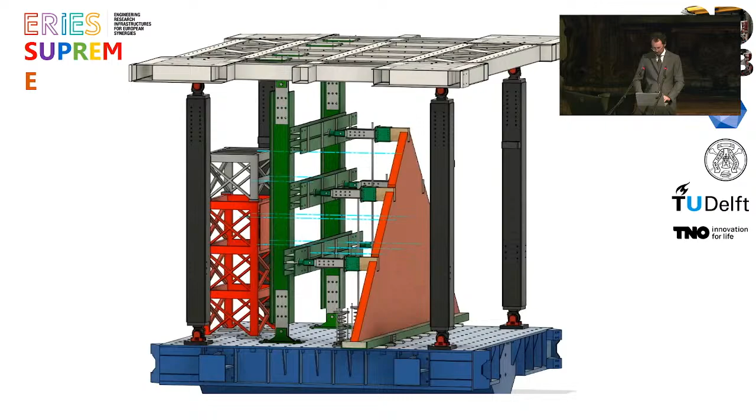In this framework, let me see. We actually propose this test again in order to understand the behavior of gables, to try to understand the behavior if subjected to the same motion at top and bottom, or different motion.

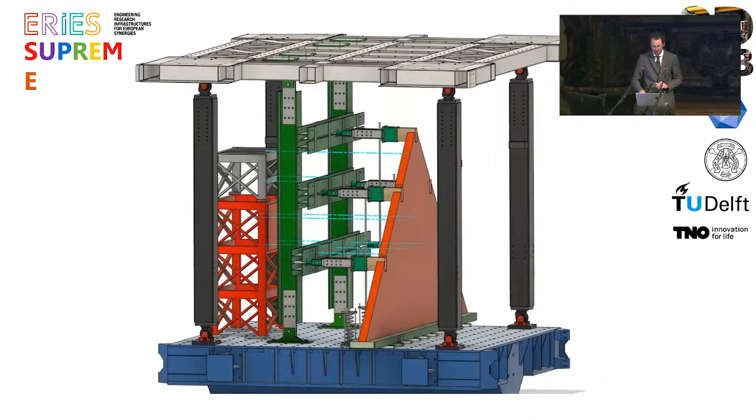Ask him, because he will be here in June and July for this test. Supreme is online.

So researchers can actually contribute. All the data and all the tests that you see today are available.

There's a service for the vulnerability assessment, coordinated by Eucentre, in the EPOS European framework of infrastructure, and there is a section for experimental data. If you don't find the one that you are looking for, among the vast majority of our experiments, send me an email and I will provide it.

I want to conclude with a sentence that is much better in Italian, but let's try in English: count what is countable, measure what is measurable, and make measurable what is not measurable.

As another former student of the school would have said: everything that can be counted does not necessarily count, and everything that counts cannot necessarily be counted. And what counts to me?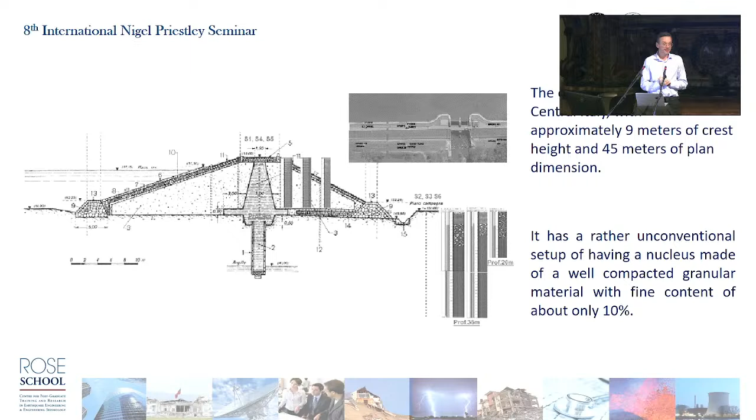Let us start with the background information. Our dam is located in central Italy, as generic as possible, with a crest height of 9 meters and plan dimension of 45 meters. It was surprising to see that it is rather unconventional: the core contains only 10% of fines, with gravel and sand, actually compacted gravel and sand, for the remaining part.

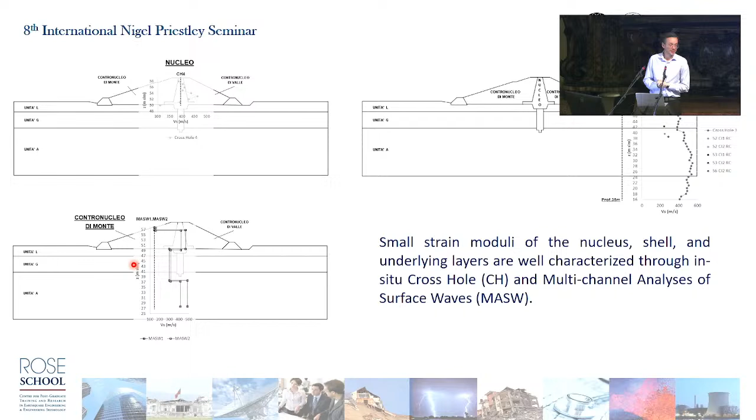Now, the small strain moduli of the nucleus, of the subsoil, and of the shell, are well characterized in terms of cross-hole and MASW. Good is always a relative term, but a standard practice campaign, both experimental in the laboratory and in situ, provides the mechanical properties, deformability, and also the grain composition of the materials and the subsoil layers.

Respect to the standards, the data set is complete. If we make an overview of the layers that we are modeling, let us start.

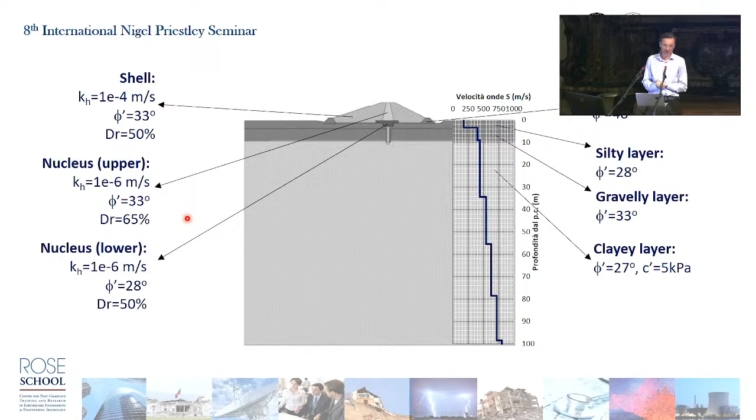So it has the friction angle. The silty layer is the first layer of the natural deposits, followed by the gravel layer, and finally the clay layer. And this is the shear velocity profile that we are going to use.

Now, the presentation is prepared in terms of analysis going from more simple to more complex, step by step. We are starting with the static analysis, following a staged construction approach in the numerical domain.

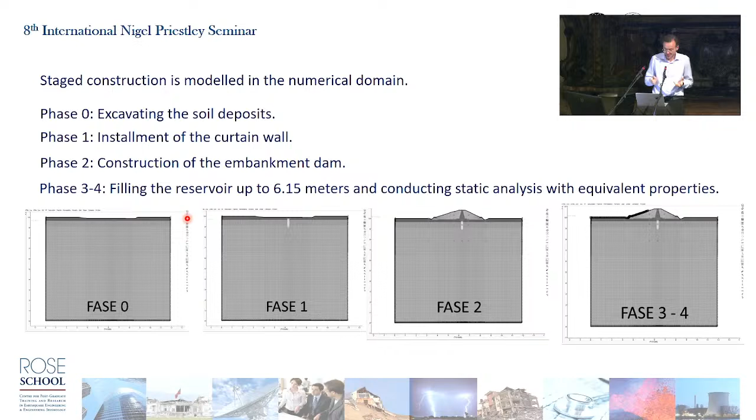First phase, actually the initial phase, excavating the soil deposits, then the insertion of the curtain wall, followed by the construction of the embankment, and finally filling the reservoir up to 6.15 meters. So we are conducting static analysis using equivalent properties, because we cannot use the small strain properties.

Operative properties in more known terminology. As the first check, the water table location formed after step 3 is compared blindly with an independent solution provided by the client, and the comparison comes out quite convincing.

Here we see a solution that is less accurate, the solution provided by the client based on the static analysis infiltration of the groundwater level.

The second benchmarking study is actually comparing the vertical displacements at the location of the embankment, top of the crest, after construction. Luckily we have less amount of clay layers, so we don't have to be worried about that.

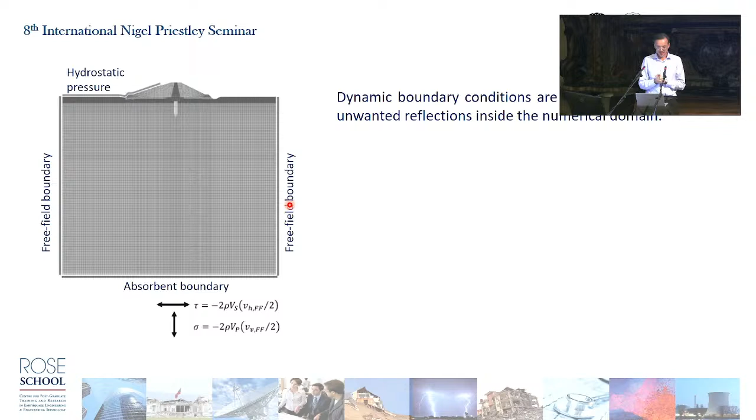Then we need to check also if the grid is capable of propagating the seismic waves. In this case, our grid is perhaps already too fine, because in the nonlinear domain we need to even capture the strain localization and everything like that.

Going up to 30 hertz, 10 hertz is good enough to model in the nonlinear domain, like a rule of thumb.

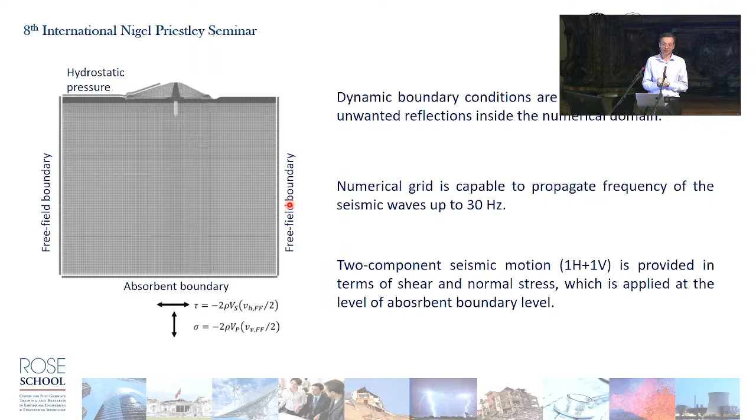And finally, due to the 2D nature of the model, we are providing a two-component input, horizontal and vertical, applied in terms of shear and normal stress at the absorbing boundary at the base of the model.

Now here comes the third benchmark of our work. Before even going to complex earthquake motions, we validate the numerical model in the linear domain by the use of a Ricker wavelet. This is an important passage because the output is visible - we can see it also by eye in the time domain.

We can see also by eye in the time domain interference, reflections, first arrivals, and we checked the response of our code with an independent software, since it is linear. In this case, we use the code Strata, developed by the University of Texas, within the ambient of the model. And we can see the overlap between them.

I forgot to tell, but we are now comparing the response of the flat model. It should give the 1D column response as close as possible. And apart from a few spikes and inconsistencies, which are due to small reflections, due to the small amount of Rayleigh damping, the correspondence is actually outstanding. This shows us that the numerical grid model is well set to propagate the real earthquake motions.

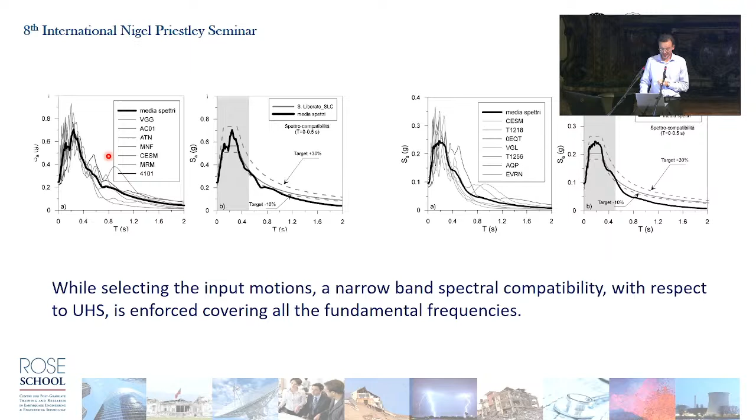As I was mentioning, this slide was related to why I selected the input motions in the environment of the dams. We can be more flexible in this case. We used a rather narrow band spectral compatibility with respect to the uniform hazard spectrum, covering all the fundamental frequencies, up to 2 times the period of the dam itself.

Now, let us see what is happening in the model. Let us see the strains, where they are accumulated and how much, still in the linear domain. Using the same linear viscoelastic model that we discussed, the maximum linear strains are calculated and stored for each grid.

Here it is quite interesting to see that, as a direct outcome of linear wave propagation in this environment, the presence of the dam increases the strain demand right below the dam.

So right below the dam, why is this happening? The increased deformation is due to the constant downgoing waves. So here they create a constructive interference, a constructive deformation demand, and they further amplify the deformation demand.

It would be rather normal to expect that with a sort of nonlinearity, those deformations will be even more pronounced. And this is actually a representative distribution of the logarithm of the gamma max over 2. So it is defined in terms of log.

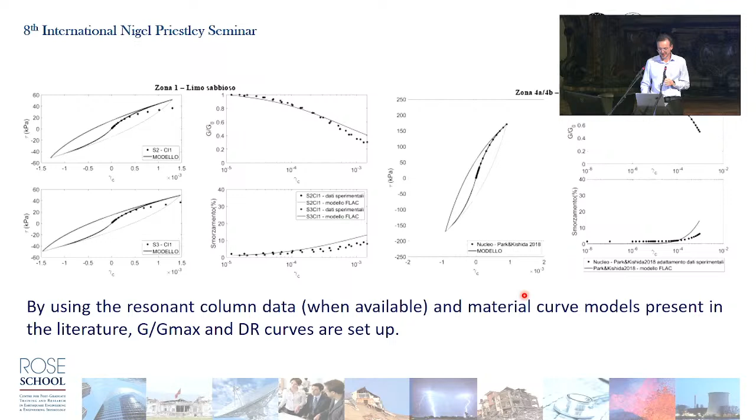So here we show an example for the silty layer, and here we are showing an example for the nucleus itself. Let us see what is actually happening inside the numerical analysis. We can see the formation of 2 to 3 shear failure surfaces, depending on the intensity of the motion. The second one is usually this one, and the third one.

And due to the presence of the larger ones, we see a prevalently horizontal displacement of the soil blocks. So the soil blocks are separating, left one going to left and right one going to right, and as a consequence, the crest is settling, because there are no more supports supporting the crest. And finally, due to all these strong nonlinearities, we are losing the amplification characteristics of the linear domain. We are de-amplifying the acceleration time histories at the crest level.

Up to here, all of the slides show more or less a standard good set of practice. So there are some what-ifs analysis. What would happen? First what-if: a different input motion suite, which is actually less demanding. Should we really use the uniform hazard spectrum or not? So we question this, by using this time a Baker type condition, which we condition to 0.2 seconds, not 4.2, not 6.4 peaks, but in the middle.

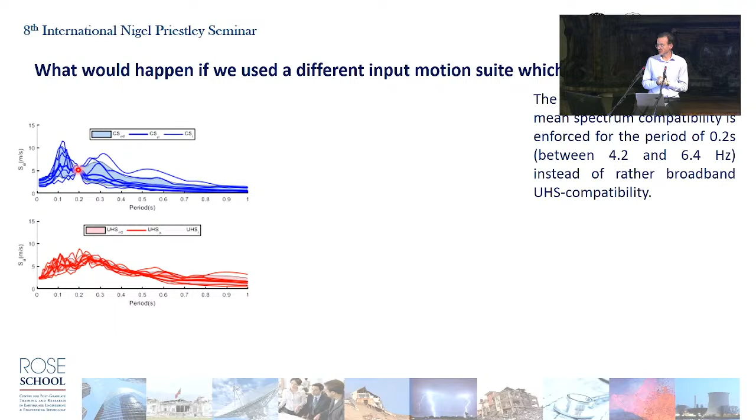And we compared our results in terms of mean with the ones that we obtained by using the UHS type results of compatibility. Results are striking. While we are finding like 12 centimeters or 13 centimeters of horizontal displacement and 15 centimeters, which is still compatible in terms of spectral compatibility, but less strict, we are halving all the seismic demands. So the question: are we imposing a criterion that is too strict? It should be investigated furthermore.

The second question is: what would happen if we considered ground instability, soil liquefaction? Now we are investigating the consequences of the soil liquefaction by use of a loosely coupled model. The data set unfortunately was not permitting us to use a more sophisticated tool where we model everything together, more reliable. This actually brings back to the discussion of the data set. The data set should have been actually calibrated better, fully.

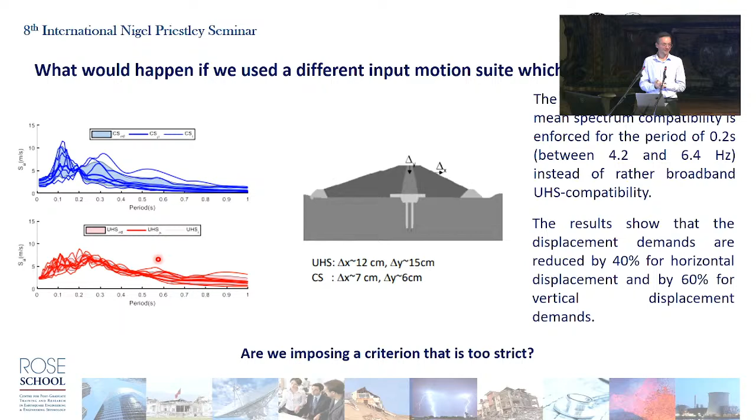Okay, are there other questions or comments? Well, I have a very brief one. I think in the following slide you mentioned modeling the liquefaction because you said that there was... Can you elaborate a little bit more on that, on the choice?

Yes, what we had was only the information of the relative density. So with this relative density, we used the Finn model, which links the shear type of deformation to the volumetric type of deformation, and it can be set up by just inputting the relative density.

With a continuous CPT profile, we would have easily used PM4Sand, which not only models liquefaction but also provides deformability, dilation peaks, and loss of strength and rigidity with the number of cycles. Unfortunately, we couldn't play with this model.